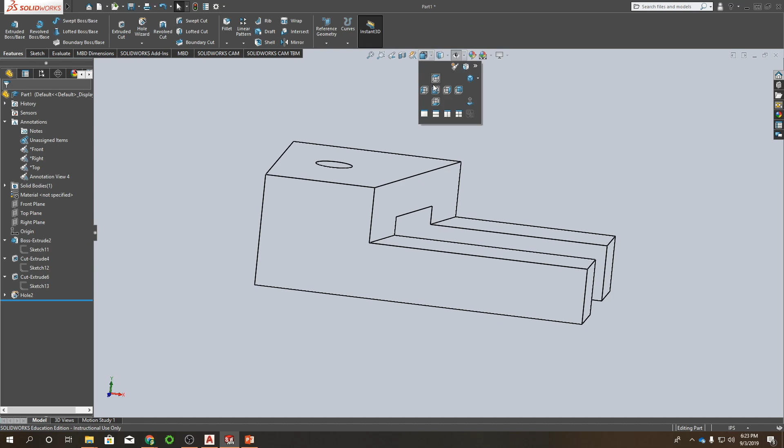Orthographic projections allow us to define three-dimensional shapes such as this one on a two-dimensional piece of paper by displaying their front, right, top, or if need be, left, bottom, and back. But more often than not, you'll be using either front, top, or right.

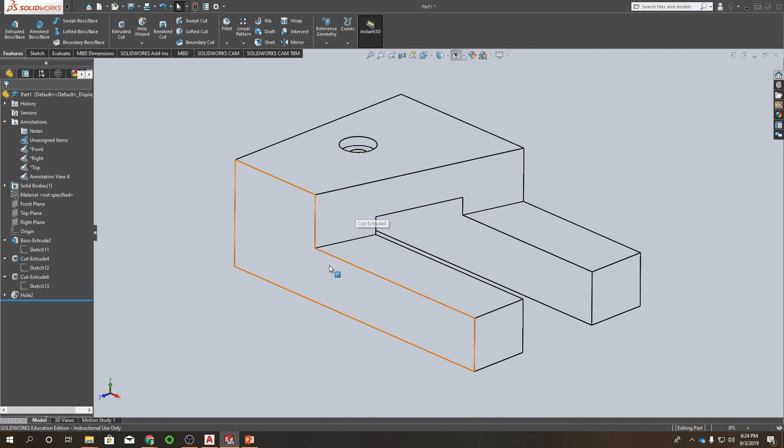So I'm going to move over. This is SolidWorks. I've just had this three-dimensional shape here to help you better understand or visualize what I'm about to show you in AutoCAD.

Okay, so moving over to AutoCAD, before you start, I would set up your layers for your different line types. For the time being, we're going to just focus on our visible lines, hidden lines, and center lines. There are more lines than that, but that's just what we're going to focus on to start.

So with the visible line, the color doesn't matter, set that with whatever you prefer, preferably something you can see. I would not set it to black. White seems to be better when it comes to printing, so maybe stick with white.

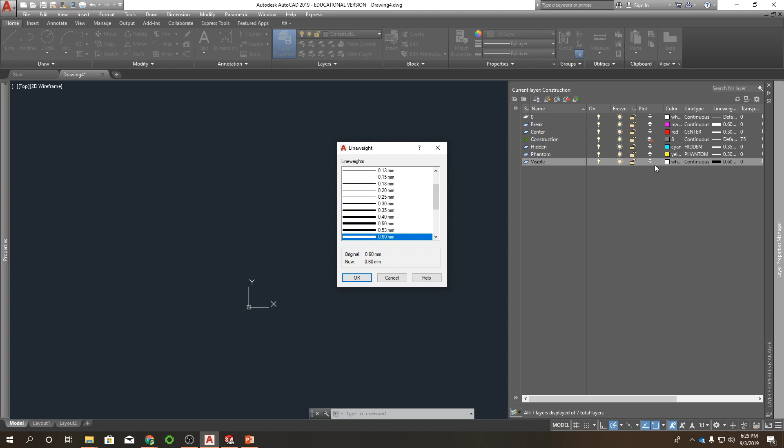The line type needs to be continuous. Line weight is between 0.5 and 0.6. I've set mine to 0.6. You can change these just by clicking on each of those things. So I clicked on that, that's 0.6. Continuous is default, so when you make your visible layer, it'll be defaulting to continuous.

Next one will be hidden. I set mine to cyan, it can be whatever color you want. The line type does need to change, so you click on that. You'll need to load that in because it should just be continuous when you start out.

So hit load and then scroll down until you find hidden, click on that. I'm going to hit cancel because I already got mine loaded. You'll hit OK, and then before you hit this OK, make sure hidden is highlighted like I have here. So if I hit OK now, it's going to be set to phantom, so I want to make sure it's on hidden. Hit OK, and then our line weight is between 0.35 and 0.45. I have mine set to 0.35.

And then the last one we'll need is center, which I've set to red, but once again, doesn't matter, just pick a color. Line type, center, so click on there, load, find center, make sure it's highlighted, and hit OK. And then the line weight for that is 0.3.

You also will want a construction line, which I have mine in here, gray, continuous, line weight doesn't matter, leave that at default. And then I make mine transparent, so they're more faint, so when you have visible lines or hidden lines over the top of them, it's easier to see.

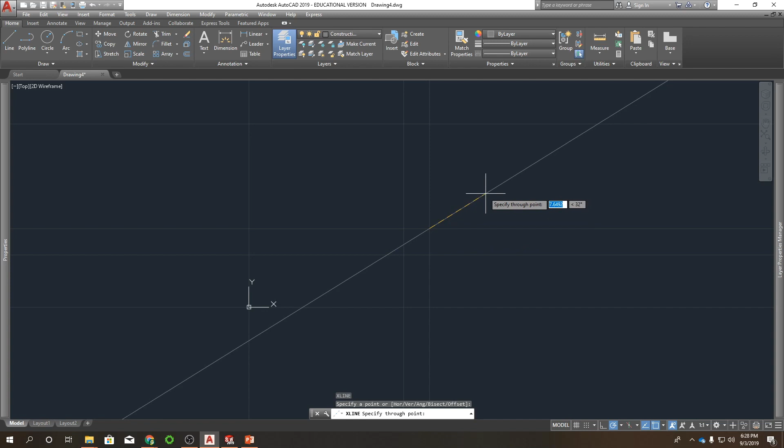I'm going to throw in a 45-degree projection line, or a miter line. So XL, click here, tab 45. So whatever construction lines intersect with this 45 and then shoot down will be equal in size to, in position to, what they are in the top view as they are in the right view.

So to demonstrate, XL at this point, and then I'm going to use the measure command here. Distance from here to here, as you can see, is 12.

All right, let's start putting in some details here. I'm going to start with the top view.

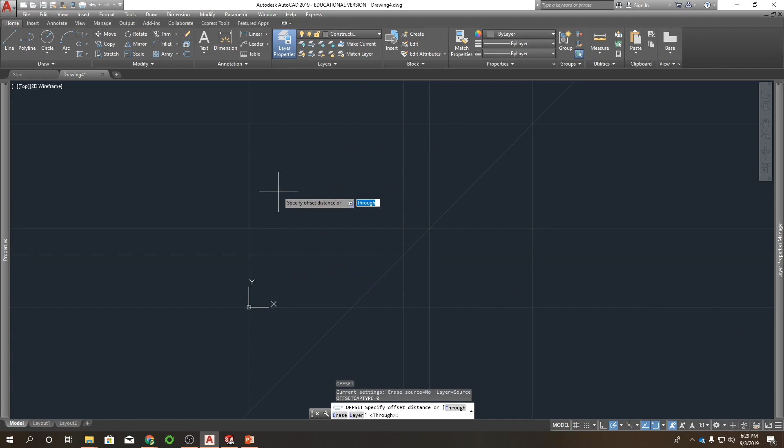Offset. There was that angled cutout, so that was 6 over from here, and then XL at a 75-degree up this way.

I'm going to fill that in with some visible lines. Line. Here to, well, since it's a rectangle, I'm going to use the rectangle tool. So rec, up to there. Line, there to there.

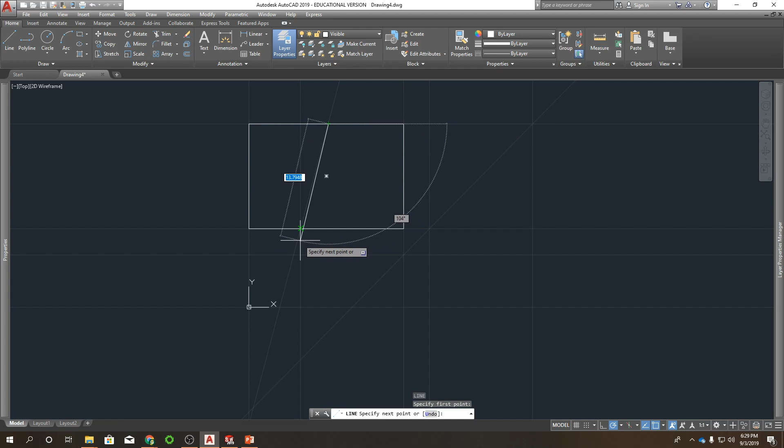I will go to the front view now, so similar thing, rec. Offset. The cutout started about halfway, 3 inches.

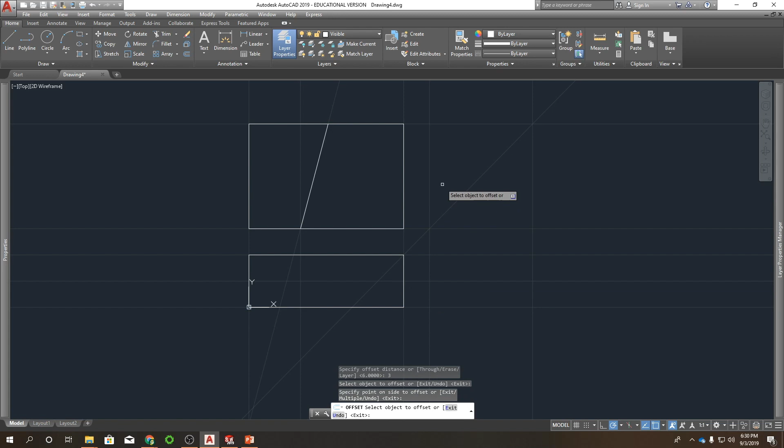And then, so now I'm going to project. So there would be an inclined plane here. So to display that, I'm going to copy this one to here. So I'm going to project down to here to create that inclined shape in the front view.

So line, there's that edge, line over here to here and up. And then selecting this one and this one, trim, and get rid of that.

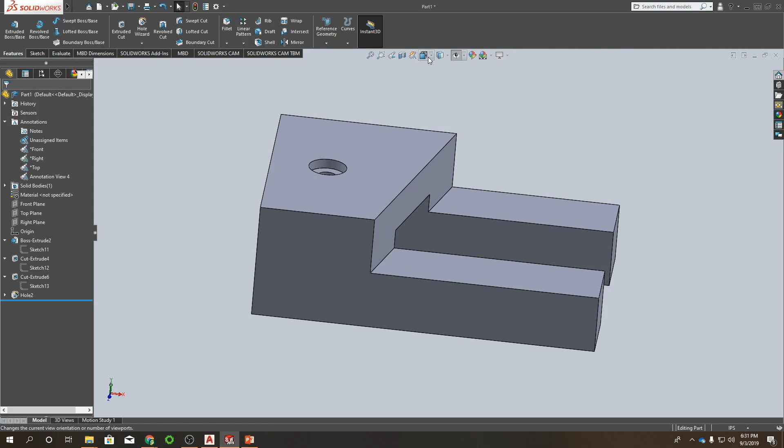So if I jump back over to our 3D object here, if we go to the front view, what I just created was this surface right here.

Just like that. Okay, so let's start up the right view. I'm going to use a rectangle again. That's 12, so I'm going to do an offset of 6 to get a center line here.

That notch was 5 inches wide and 4 inches tall, so an offset of 2.5 from the center here. Escape a couple times. Offset 2.5, there we go. Here to here, here to there, and then an offset of 4 up.

And then I'll do line here to here to here and there. Select this line and this line, trim, and trim off that line. We need 2 more lines. This edge there, there to there, and there.

So that cutout's going to create a notch here in the front view, which in order to get that, we're going to need to project over and down from the top. So a quick way to do that, these going up hit the 45 and then over are going to be the same size in the top.

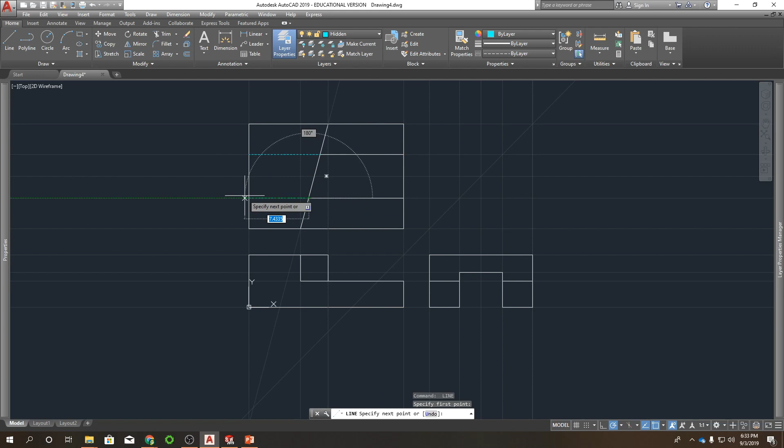So if we look at our top view in our 3D, those are visible, those are hidden. I'll swap the, just like that.

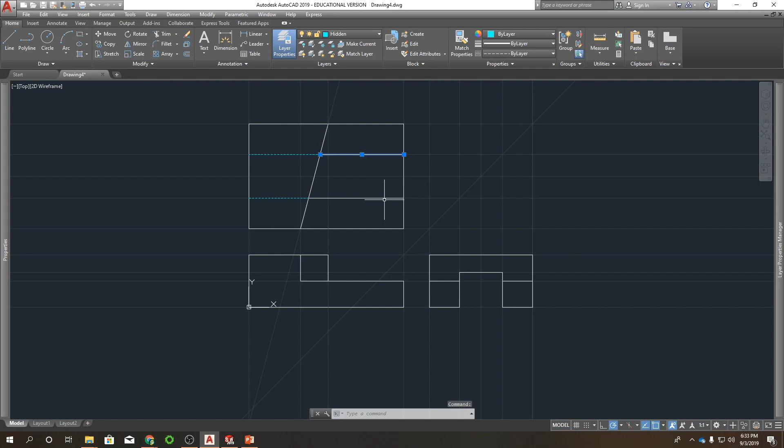I need to trim out that piece there. So I'm going to need to project this point and this point down. So I can just copy one of these construction lines. There to there and there.

And then there's that little cutout shape right there. So I'll just take line there, there, there, there.

As you see, I left my hidden layer on. A quick way to change these over to visible, because that's what they need to be, is MA for match properties. I'll click on a visible line, select all those, and press enter.

So we're going to need another hidden line from here to here. Press enter. And that's good. Now the last thing I have on there is

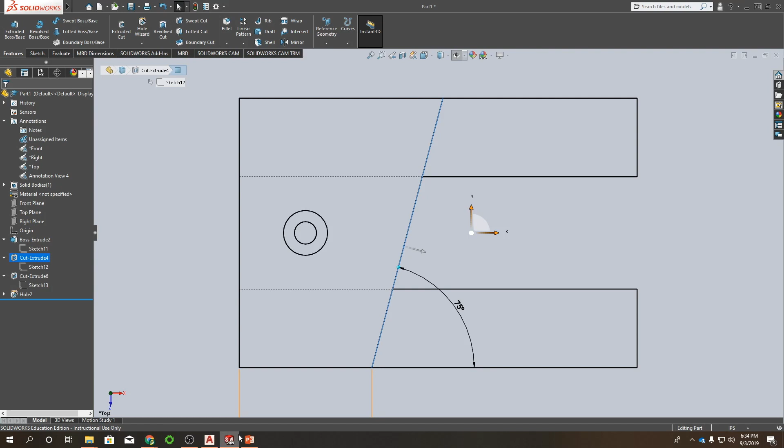this hole here, which is a counterbore hole, which you'll see a lot on drawings. So I'm going to show you what the dimension kind of looks like for that. So the top dimension here, the 1 inch diameter, is the small hole here. This symbol here is for counterbore.

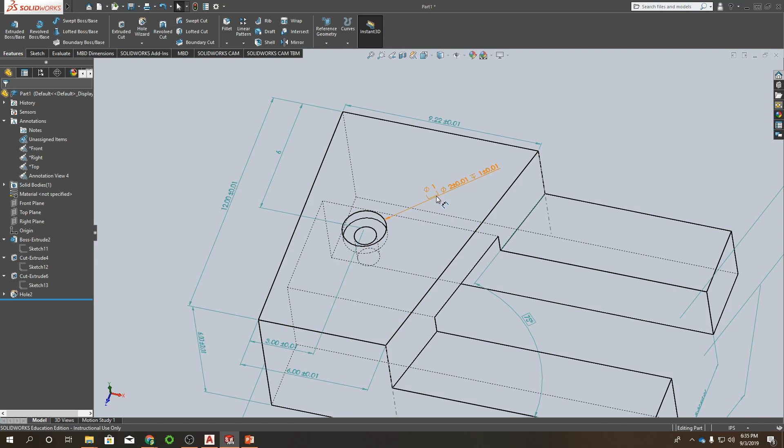Then it's a 2 inch diameter counterbore hole that goes down 1 inch. You can ignore these, they're tolerancing, you can ignore those for right now. So the 2 inch diameter hole goes down 1 inch, and then the 1 inch diameter hole starts and goes all the way through.

So I have that centered between about here and then halfway between this point. So offset 3, and then I'm going to circle.

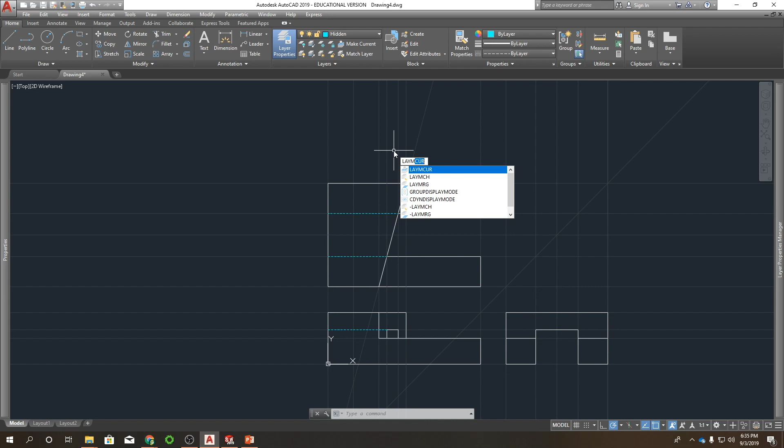I need to be on visible, so there's layer match current. So if I want to quickly switch to visible lines, I can use this command, layer match current, press enter, and then select that. Now I'm on the visible layer.

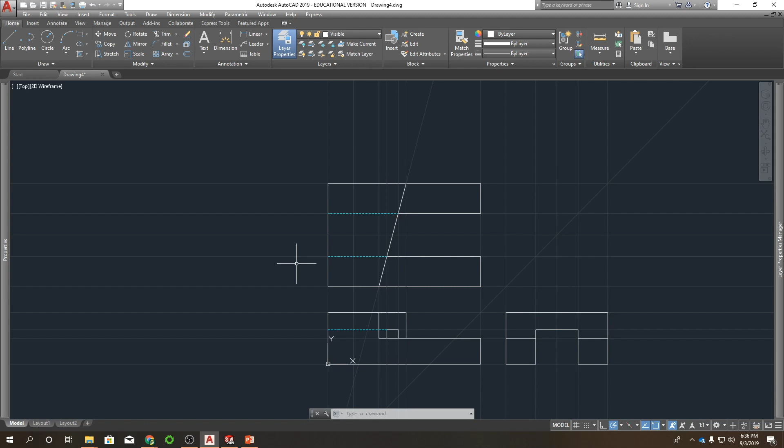So instead of having to go all the way up there, which I know doesn't sound that hard, but when you're doing more complex parts, it can get tedious to always have to go back and forth between switching through layers. So using some of these commands can make your workflow go a lot faster.

Circle right here, 2. Repeat my circle right there, 1, and then shooting a construction line down here, here, here, and here.

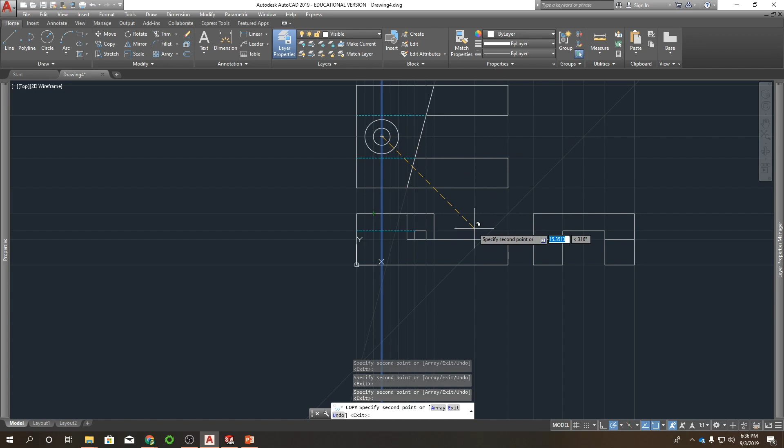So a hole looks like a rectangle in whatever view you're not looking at the top of, or on the side view of it. So I'm going to offset, like I said, it goes down, was it 2 inches?

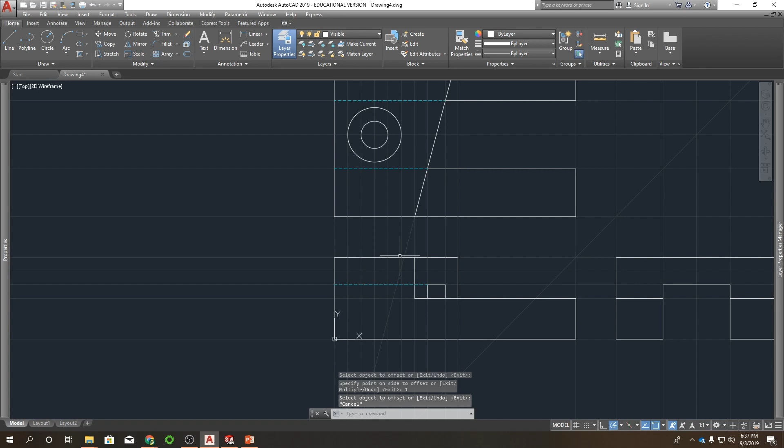Or no, it wasn't, it was 1 inch. Yep, so a depth of 1. So I'm going to put line here to here, to there. Oops, I see what I did wrong.

Circle, that was diameter, I did. So that should be, that one's fine on the bottom. That one's no good. 0.5.

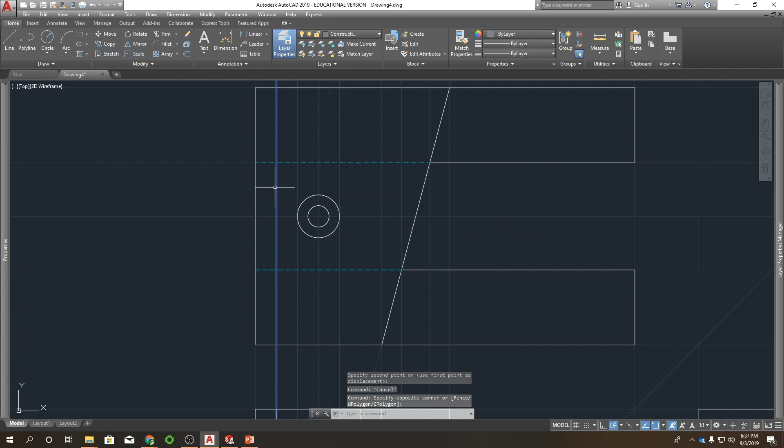M for move. I'm going to move my projection lines down or over to there. There we go. Let's see if this works. Sometimes it works, sometimes it doesn't. The stretch command, yeah, it just kind of moved it at that point. Just move.

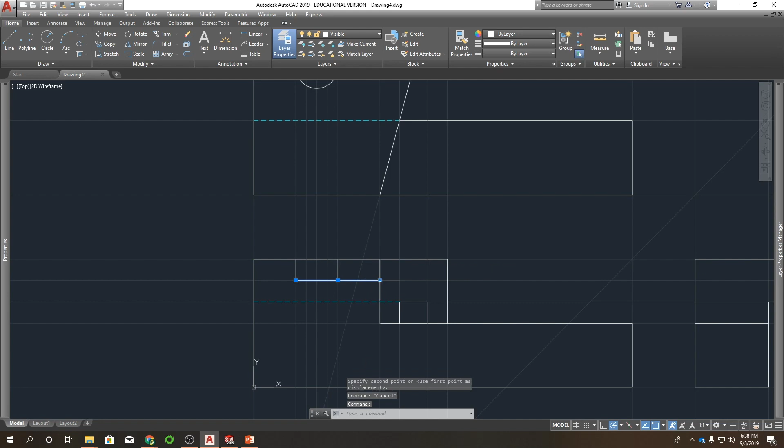I'm going to grab my grip handle here. If I hover over it, I get some options here. I'm going to use the lengthen, and I'm actually going to make it shorter, not lengthen it, but still. So that's a quick way of adjusting lines like that.

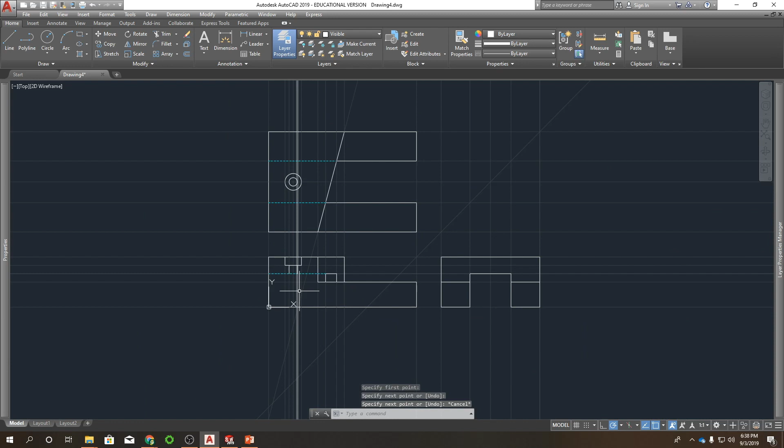Line, there and there, there. There's my counterbore, looking at it from the side, but it needs to be hidden. So match properties, MA, click there, select those. So it's a circle, so it's going to look the same on whatever angle you're looking at it.

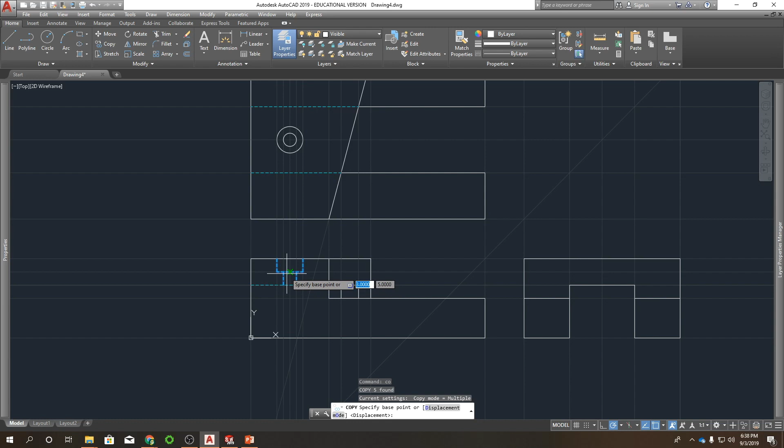So I can just select all these, copy, get a base point, and move it right there. And that's done. That is a 3-view representation of this 3D object. So I'll assign several 3D objects for you to create into multi-view drawings,

and we'll be doing a lot of that because that is a lot of what this job is.